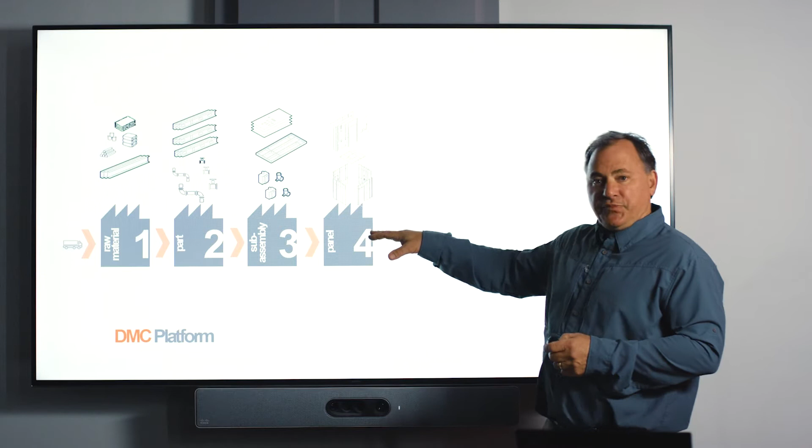So we take that, and in order to make all of that work, it requires a platform. So if you remember, the title of the talk is Platforms, Programs, and Projects, right? So it starts with an ecosystem or a platform, and that platform takes the building information model and it coordinates raw material, which is then digitally processed, G-code, into specific parts, which is then put together by operators, not necessarily by skilled tradesmen, into sub-assemblies, which are installed by operators into two-dimensional panels, which can be aggregated into three-dimensional modules, which can be further nested into large Uber modules, which I'll explain later, which can then turn into buildings. So this is our platform. And it is the way BLOX is beginning to undertake changing an industry.

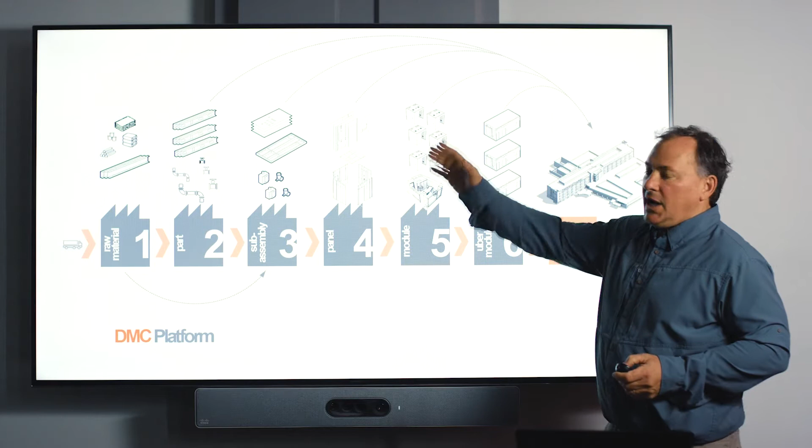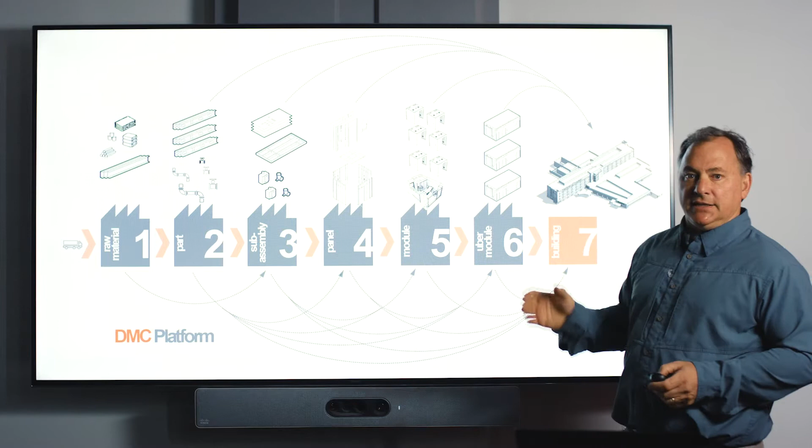So it is important to not think about this as a linear process from A to B or 1 to 7. We think about this as sometimes the situation, the exigencies on the site mean that raw material need to go straight to sub-assemblies because we have a really brilliant supplier. Or maybe we have a part that can go straight to the job site. And maybe there are hundreds of other exigencies that will require different neural pathways to find an optimal path from a raw material being converted to a building at the end. That's our objective.

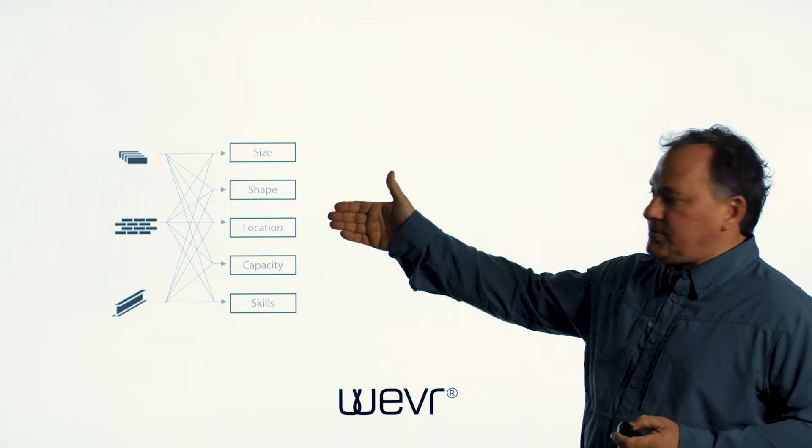So underneath that portion of the platform is technology. That technology we have is called WEVR, and it's simply about tying disparate things into a whole. WEVR is raw materials organized digitally with a series of constraints, size, shape, location, capacity, skills, etc., organized in such a way that they reside on the cloud and that they can be produced into a digital catalog, which an owner or user can pluck out of it. At the same time, there's another half of this, which is there are manufacturers, actual physical, real-world manufacturers that can use this data to make parts. These parts then ultimately are delivered not just as a digital format, but as a physical artifact, right? So this is an important component of what it takes to change a platform.

If you peel back and look at what that platform is underneath it, it looks like a series of routes, and it starts with raw material, standard parts, and non-standard sub-assemblies that can be aggregated to groups. All of these are components that work as part of the platform to produce bespoke or relatively bespoke derivative products that come out of that platform. Specifically, that platform is a container which holds the design, manufacture, construct DMC operating system. That operating system has analog components and digital components, rules essentially. These things are constantly being developed, but they have a concreteness right now.

The second one is it organizes the components. It organizes the applications. So if we were to use the analogy of the Apple phone is a platform, then the Waze app is an application. And then ultimately there are services, things that take the platform and extend it beyond just the design, manufacture, and construction, but the service life of the building.

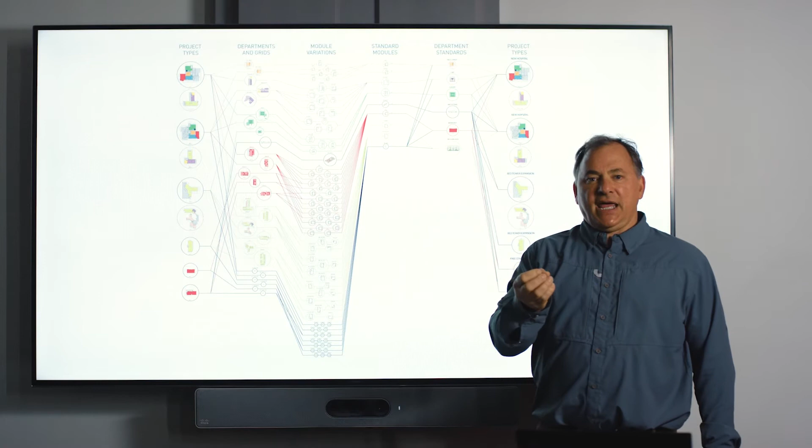And they said we have robust design standards that come at a department level, but we have this amount of variation that is inescapable. And so we looked at all of this and said, wow, let's study this intently. And we said, despite your design standards, you didn't have intelligence standards. They couldn't be converted into action. The action made them become an array of variations.

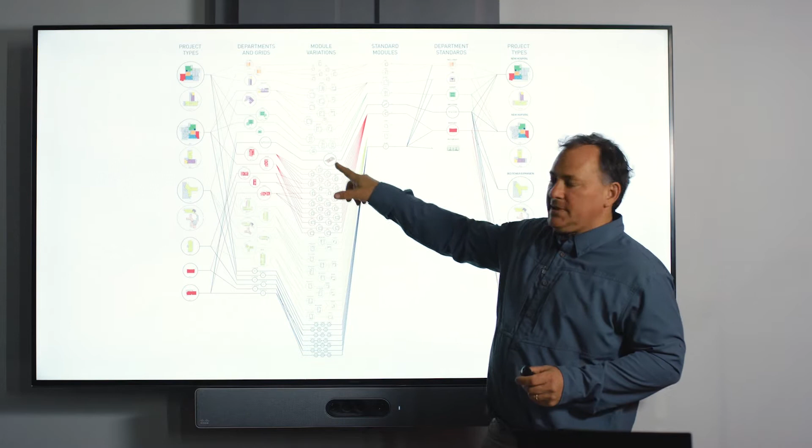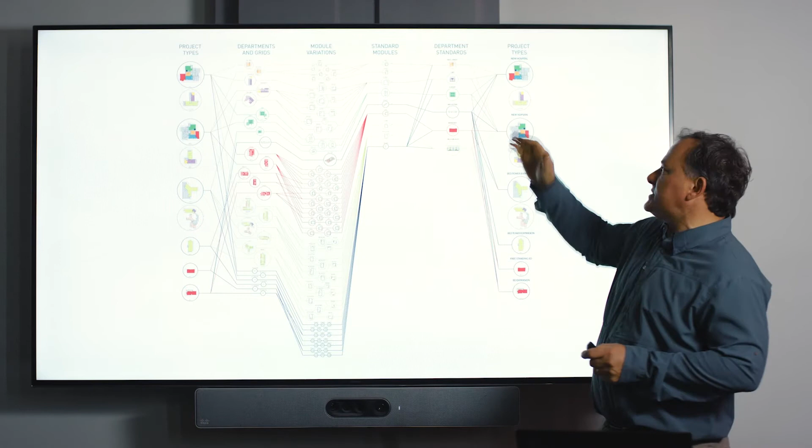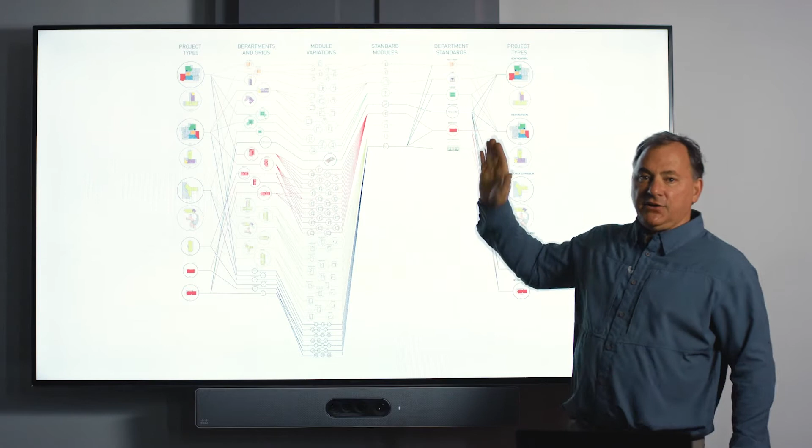Pretend this is emergency department and these are exam rooms, and there were hundreds of exam room types, or a patient room and there were hundreds of patient room types, even though their standard only allowed for 4 or 5. We found a way to compress those pieces to a series of standard modules, known intelligence standards that could be produced in such a way that you could deliver them to the same department standards, and they could populate this array of pieces. It was a pretty major step in our timeline where this amount of variation got reduced to this amount and could still achieve the end game.

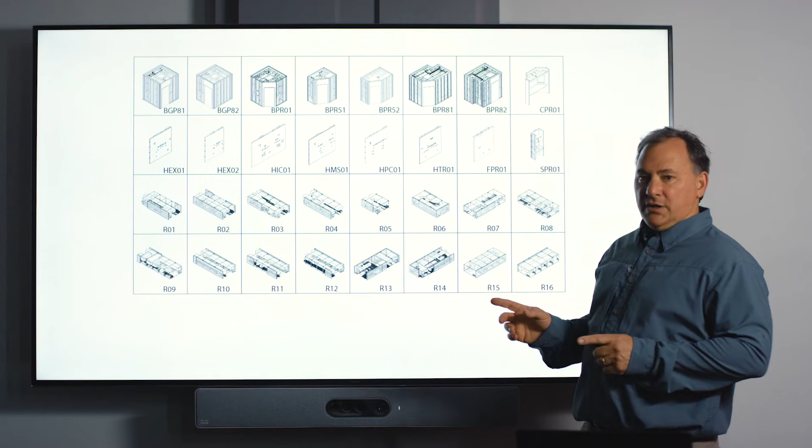So the first step was to eliminate unnecessary variation. Once the unnecessary variation was eliminated, we were able to standardize. And what I mean by standardize, we could really create robust, intelligent parts out of these pieces, much the way the automotive industry works. Once we could create standard parts, we could begin to create interchangeable parts. We could create a series of parts that would work for a client that could be used from Miami to Maine, from Georgia to California, which was really exciting.

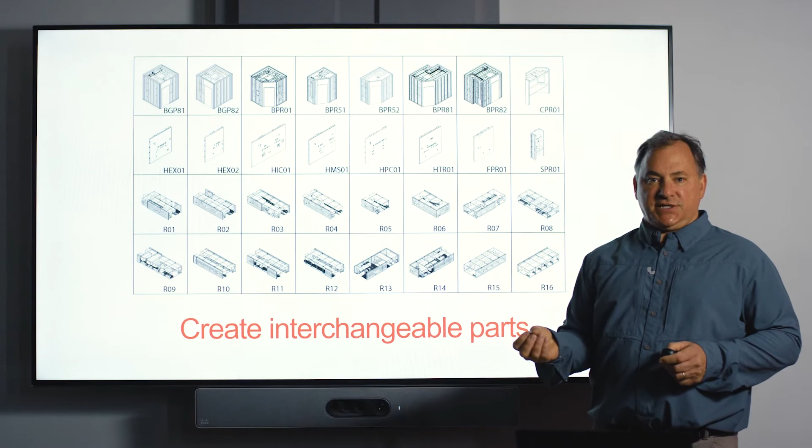So we did these 3 things. We looked and understood intelligently how to remove unnecessary variation, keeping the necessary. The necessary variation was then standardized.

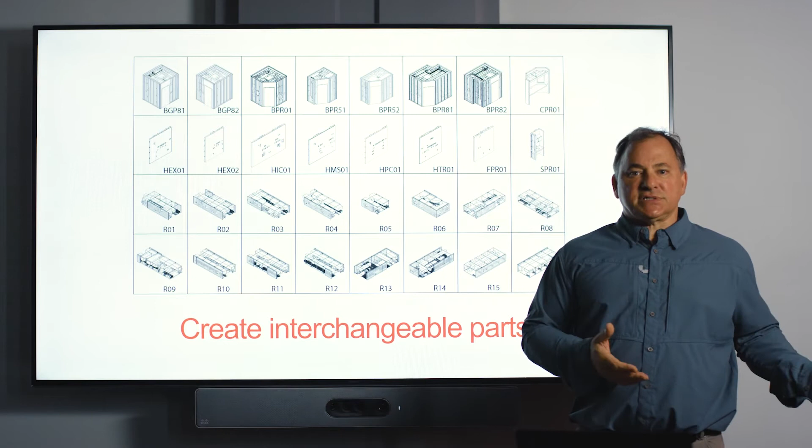The standardization then was turned into common denominator parts that would work around many regulatory zones, that would allow it to be used so that we could order in bulk purchases things that we didn't know where they were going to go yet, right? Which allowed us to level load our lines, which allowed us to level load our supply chain, and it began to really change the way we thought about this.

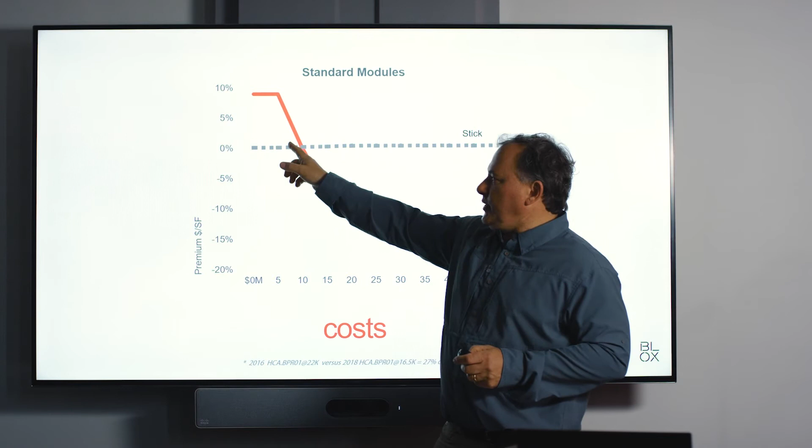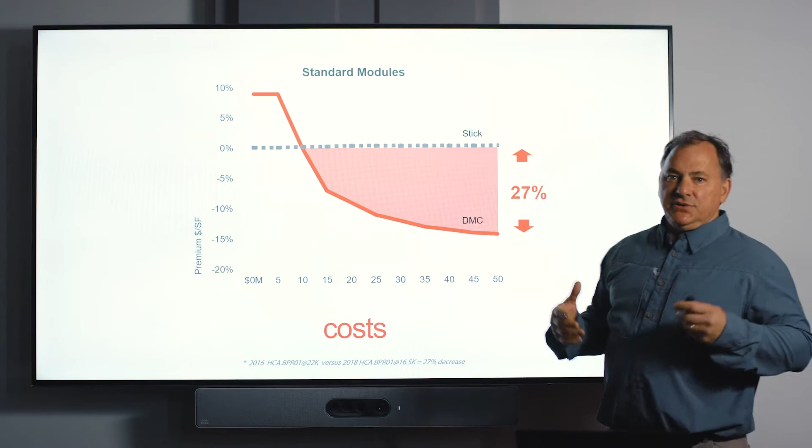The cool thing was, if we look at a graph, the cost of stick built was the baseline, and in the beginning at low volume, stick built was the same as it was at high volume. Unfortunately, we were more expensive at low volume, but as we added volume, we dropped our cost significantly, and our prices were able to be reduced as well. So this area right here was reduced in a matter of 24 months by almost 30%. Pretty big moves.

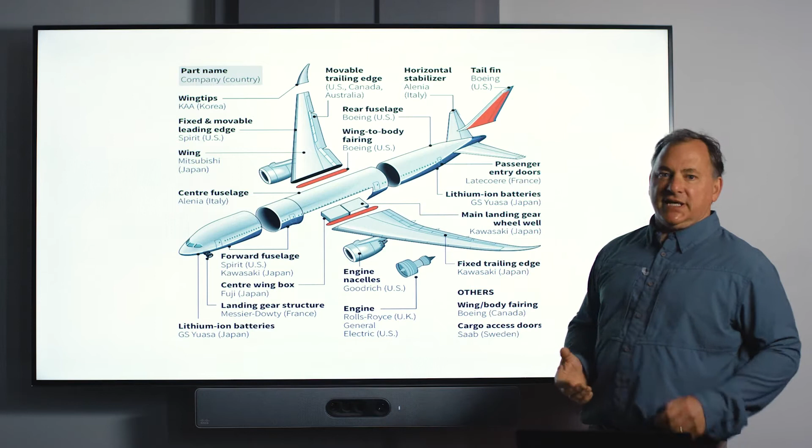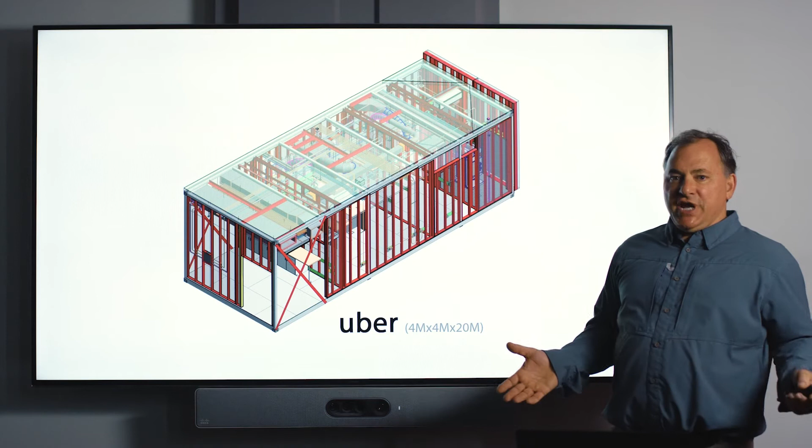Our chunk, our module, is called an Uber module, not because we like ride sharing, but because it's the largest thing that can move on a Department of Transportation right of way in the North American road systems. So it is translated 4 meters wide, 4 meters tall, and up to 20 meters long, jam-packed with complexity. That Uber frame, though it can vary in size, all of the connections are standardized.

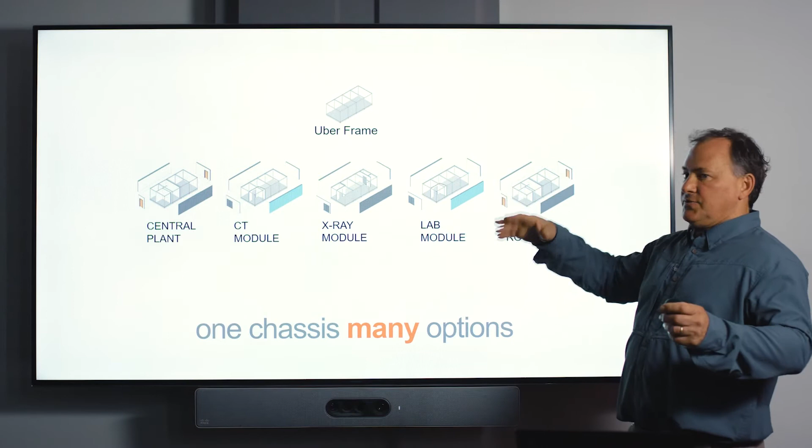We have digital fabrication that allows us to make that in basically any shape, so that we can create a central plant, a CT module, X-ray lab, and the list goes on, and it adds over time. This goes back to that digital catalog. All of these things reside a priori before a project starts as well-defined components.

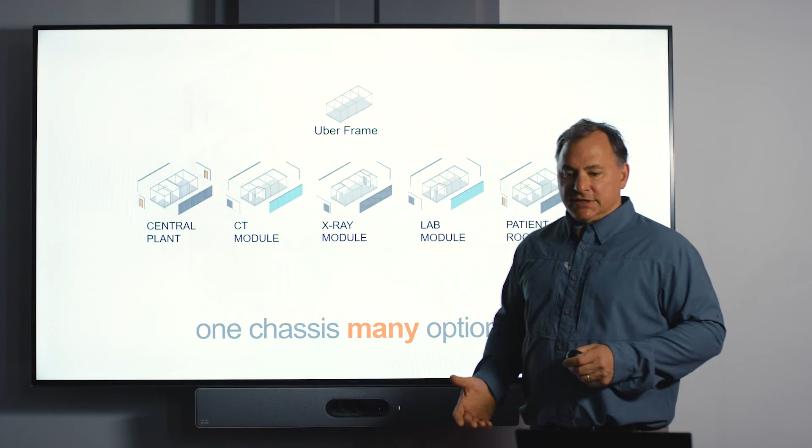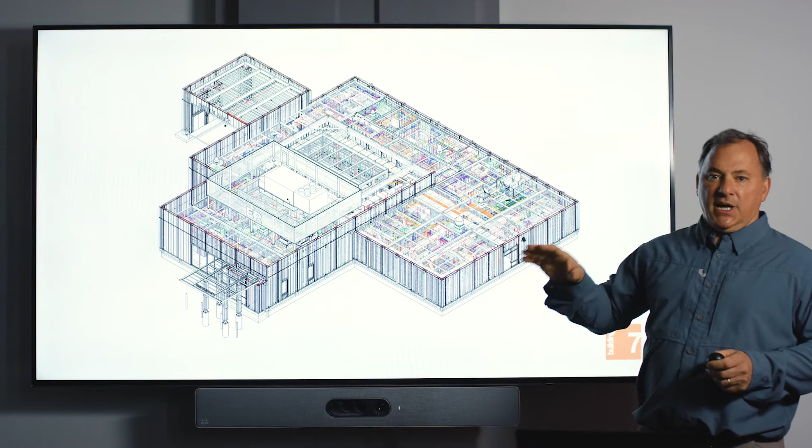This is a building information model of that freestanding emergency department. Remember, this is an acute care hospital. This is a complex, life-critical building. You can look at all of the pieces in it. It's pretty heavily modeled. If y'all are thinking building information model of 300 or 400, think 5 or 6 or 700 in this. This is one of the components that's broken out.

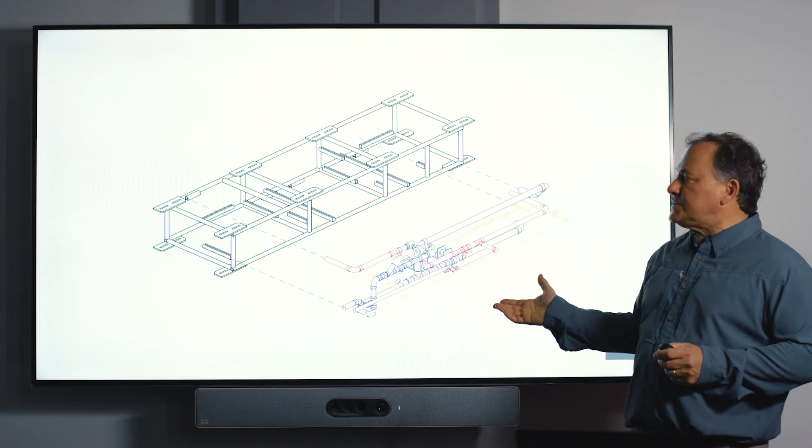It is defined by the Uber module. It has an enormous amount of complexity in it. That complexity is broken down into parts. This happens to be an MEP, multi-trade racks, which breaks down into sub-parts, which breaks down into a bill of materials, which breaks down into a specific elbow, which then works with our in-house software that allows us to develop pretty rapid bills of material for those parts.

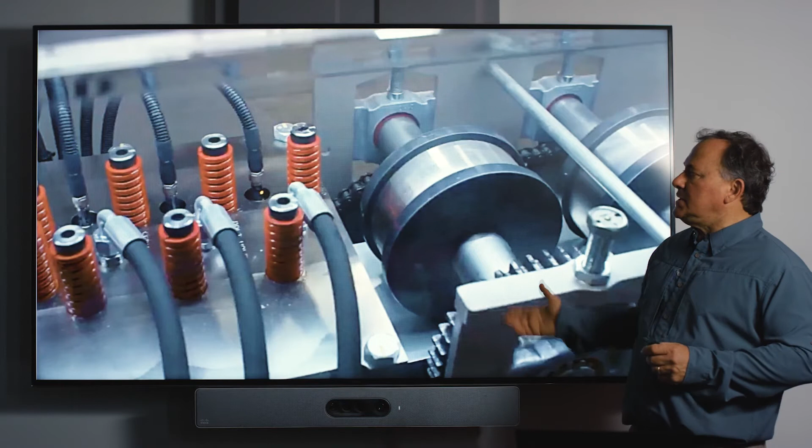It allows us to coordinate and basically distribute those pieces, turning it into a G code, which makes bespoke parts out of standard parts in such a way that we begin to really change the supply chain. This is what it looks like as one of our first iterations of our Uber module line. It's here from 1, it actually goes to 20. You can see it's a raw frame and it's systematically adding pieces. Sub-assemblies are being fed from the side.

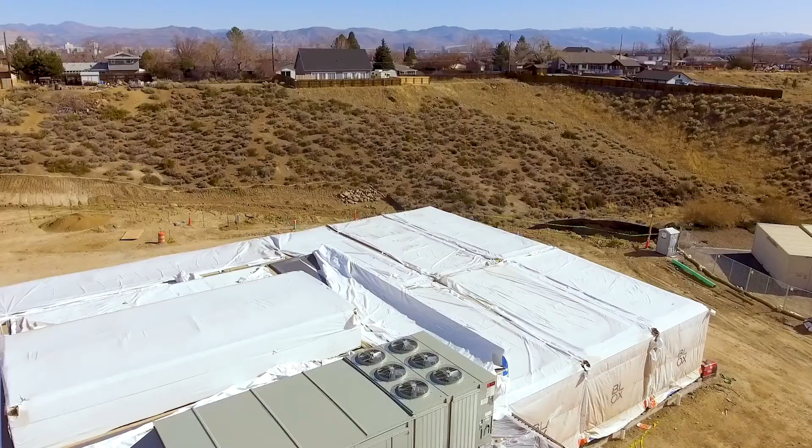The next step in the journey was our clinic program. And this is where we had a large international client that wanted to build 500 clinics in 5 years, starting during the pandemic. Challenging piece. We were motivated to do this because their objective is to create accessible and affordable health care for Americans, which is something that was near and dear to our whole team's mindset.

So we embraced this challenge and then developed a system that could begin to think about how you could get to 500 in 5 years, 100 per year, which would translate all the way down to opening 2 a week, right? Which is a crazy pace. We're not there, but we're on a path to get there. And this is how we got there.

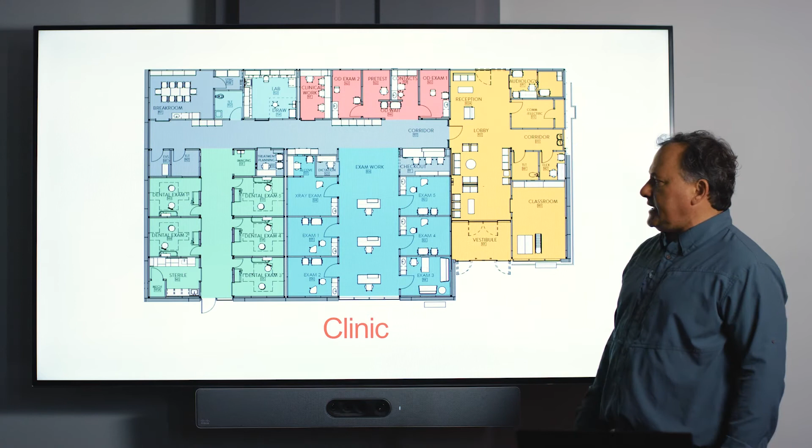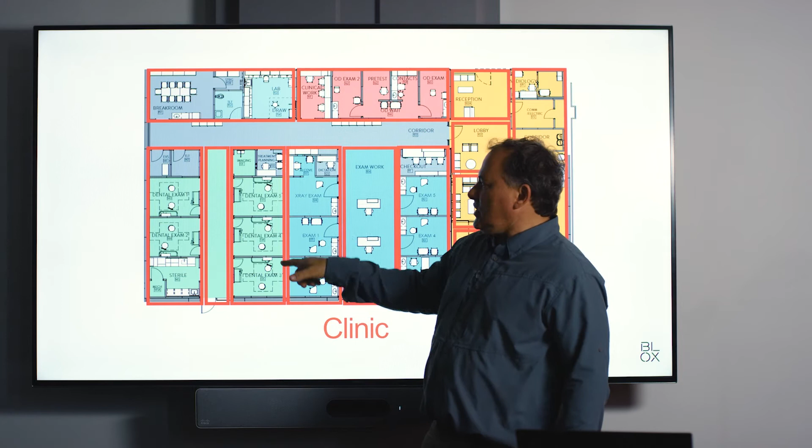This is the basic clinic, and it's broken up into these modules. These modules are interesting in that instead of pulling from a central plant and bringing wires and med gases to each one of those pieces, we treated each one as a wholly separate piece that was connected with one port on the outside of each one.

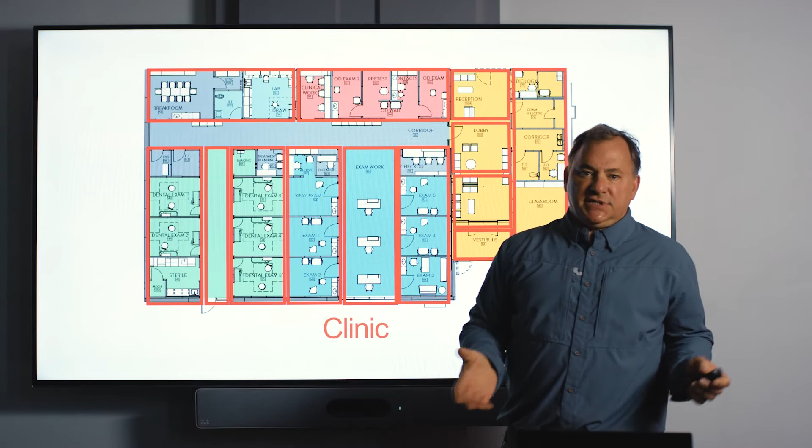This seems pretty obvious to you guys in New Zealand, but in Alabama, which is where I'm from, we're slow and it's the South. So it took us millions of dollars to figure out that, which I just told you for nothing.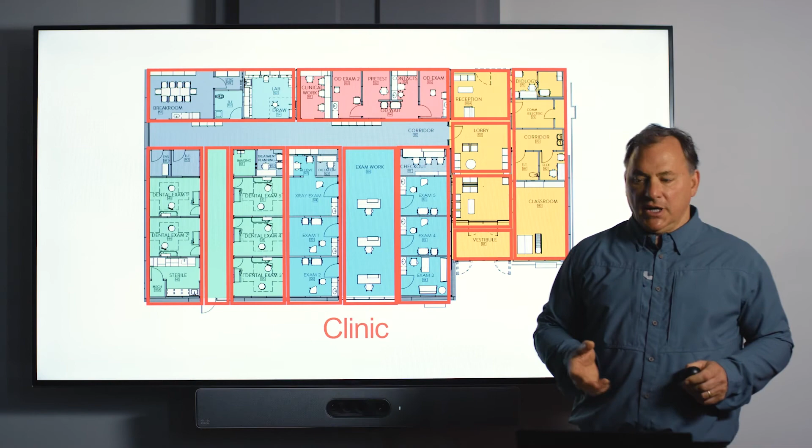And what it allowed us to do was to radically simplify. It increased the complexity of manufacturing, but it decreased it in the field, which is where our biggest constraint was. So this is what it looks like doing the whole piece.

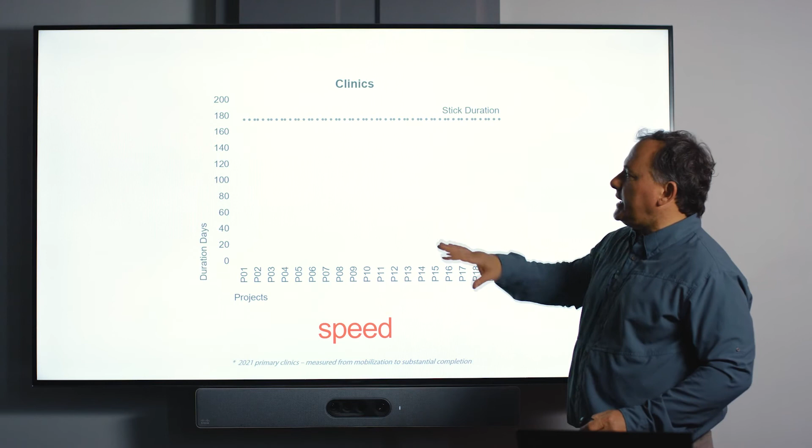So let's look at the metrics of how this thing ends up. We're going to look at the baseline, which is a stick-built duration. We built a few by stick in the beginning as we were tooling the plant. And it's roughly 180 days to get one from design into the owner's hands so that they can use it. We did our 20 projects and we started a little bit faster, but rapidly improved.

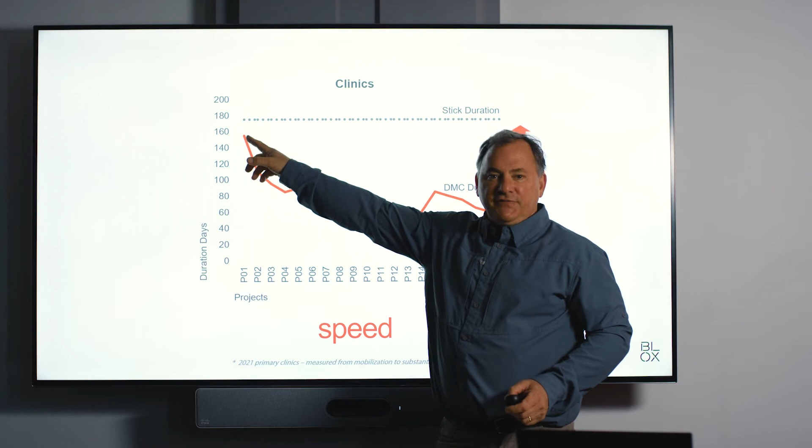Here you see an increase again. This is where we changed states, which meant we had to kind of go through a regulatory adjustment. But at the end, we're hitting 66% improvement from a baseline. So not quite 2x faster, but approaching that. We're trying to get this to 45 days.

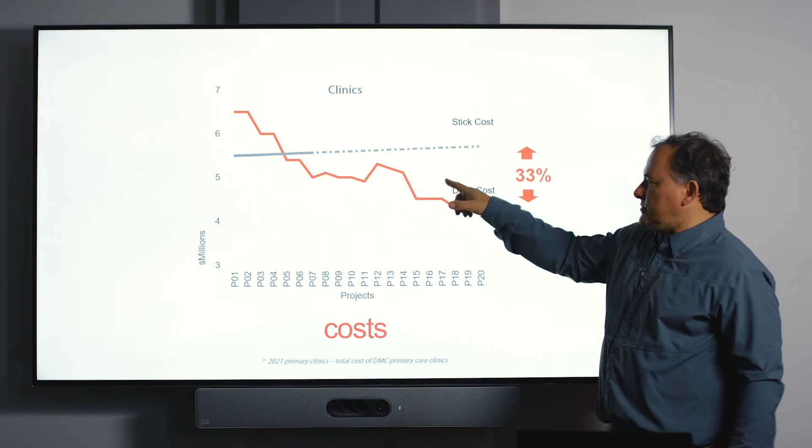The second one is we can look at cost, and the baseline cost was the gray line here, which is a stick-built piece. And we started more expensively, and rapidly, by project 4 or 5, we were already below it, and then we kept moving down. You can see this kind of corresponds with that bump in the speed, which is when we move from one state to another state and have to go through some regulatory hurdles, and then it moves back down. So this 33% is pretty exciting.

So we're starting to see value. We're starting to see speed. You saw the video. You can get an idea of the quality. So all of this is starting to happen this year, where we're producing one clinic every 2.5 weeks and delivering that to the owner every 2.5 weeks. So pretty overall amazing for us. We're happy to have been part of that, or to be part of that.

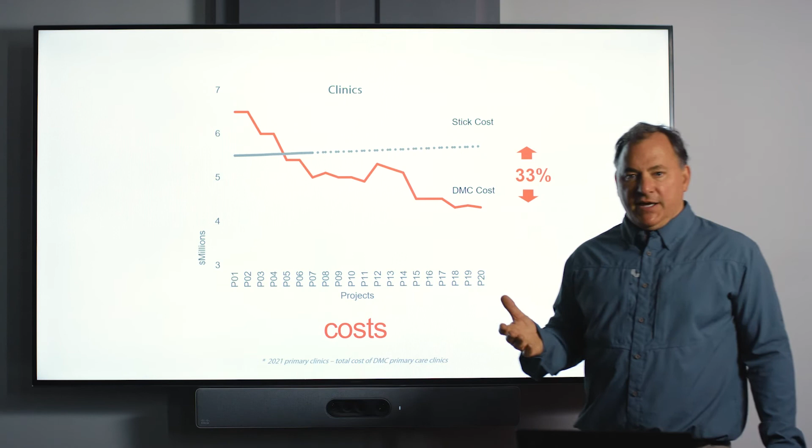This is kind of an idea of how you can see how 20 clinics were produced in 3 states in 12 months. So we'll get to the last step now along that complexity curve. It's where we're headed today. This is just a teaser. I was just at a job site in Katy, Texas yesterday, where we're putting this first piece in. It's pretty exciting. It's patient beds, so we're talking about acute care facilities, overnight stays for a rehab hospital.

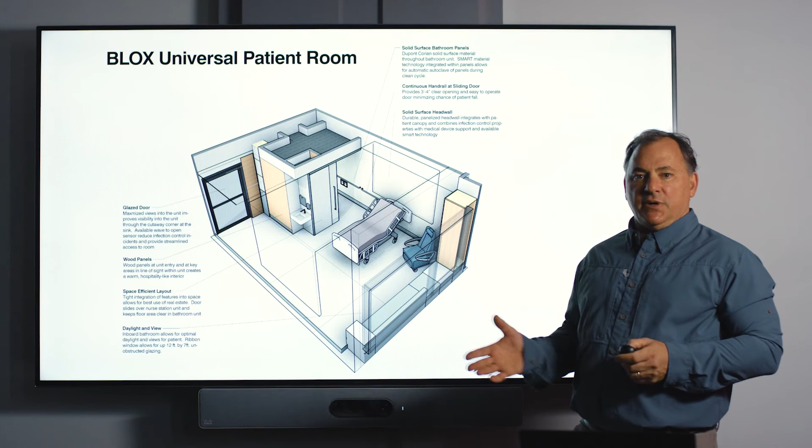It starts with this idea that we've been working on for several years, which is a universal patient room, a place that is able to handle an ADA patient, a med-surg patient, a rehab patient, etc., in such a way that it can be a standard that's used and deployed in a best-in-class way in many different departments. This is what it looks like.

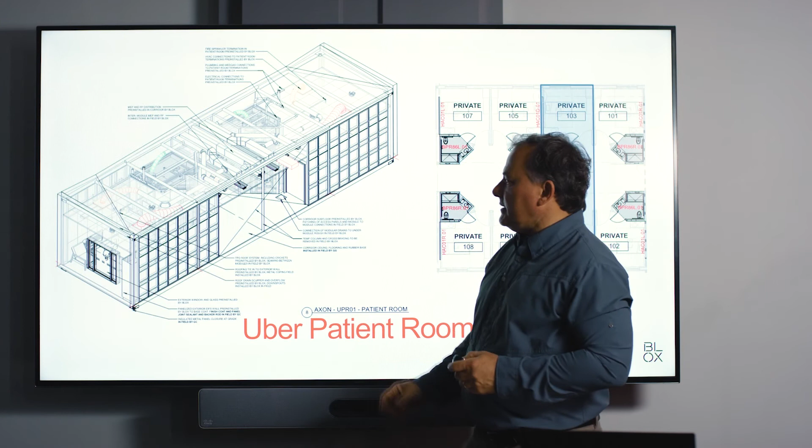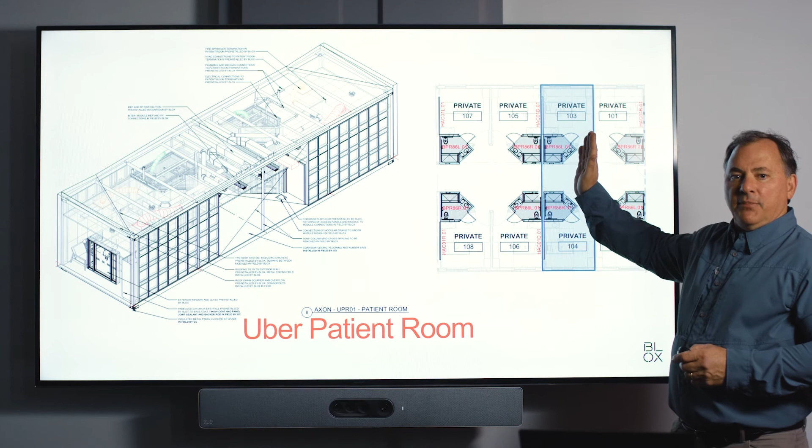So it's a handsome room. It's organized in an Uber module. So this is one half is a patient room. This is the other half. The corridor moves through the middle of it. You'll see there's a column here in the middle of the 8-foot corridor, and that is a temporary one that goes away. We'll talk about how this is one module that can be used both for the left hand and the right hand. So that allows it to be bilaterally symmetrical around its central axis.

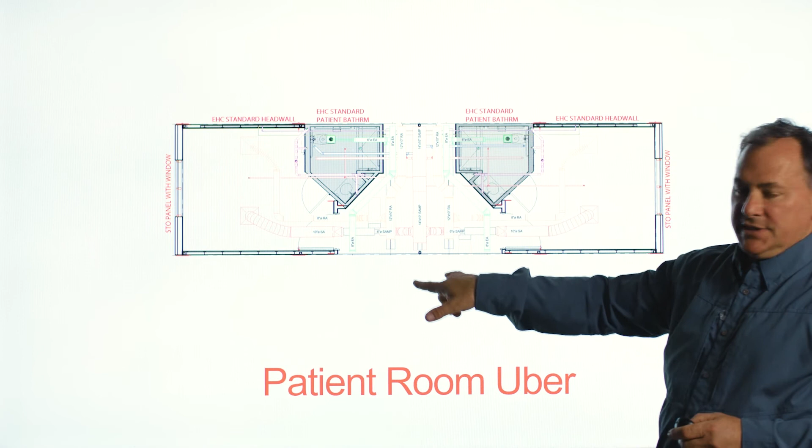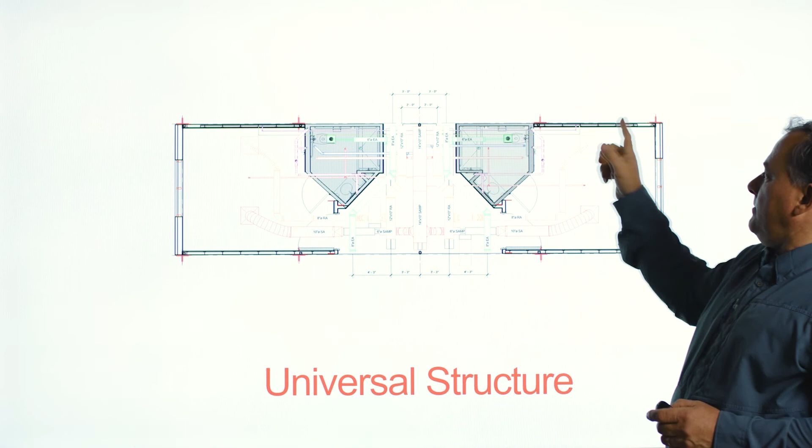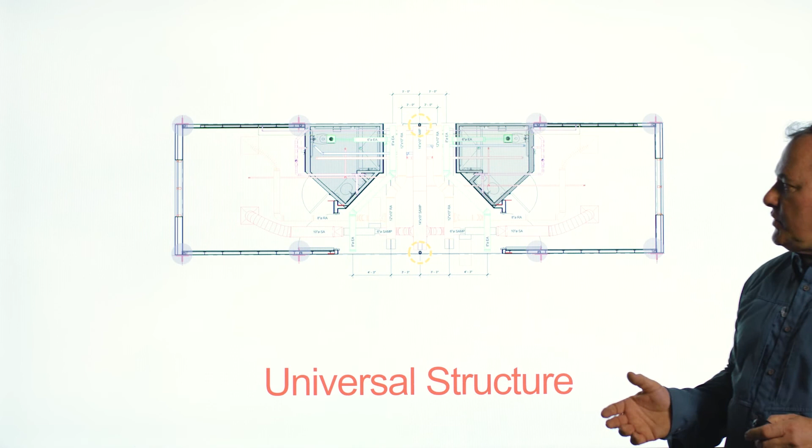So this is what it looks like broken down. This is the above ceiling. We'll take a mental note of that, and we'll see how the patient room Uber works with the structure. So the structure members are here. There's a temporary member here in the middle, which is allowing us to ship these 20-meter long units. And then you'll see the MEP connections, which work with the other sides of it so that you can create connections that are very easy to stitch together.

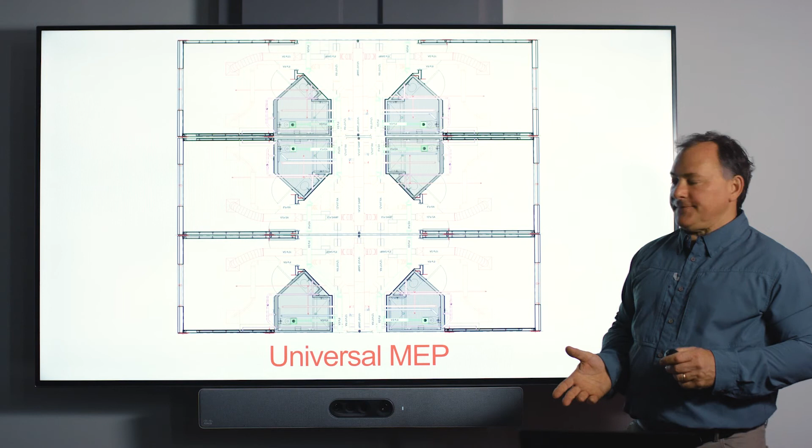In order to do all of this, there are a series of conditions that I would encourage you to think about, or that we have thought about. The first one is a product mindset. It's what we talked about. Divorce the notions of project by project. You won't get the leverage that you need. Think about the ecosystem, how that connects to a platform. It can be yours, it can be someone else's. We offer ours if you're interested in it. To ultimately move a project that's extracted from an ecosystem which is designed to do so.